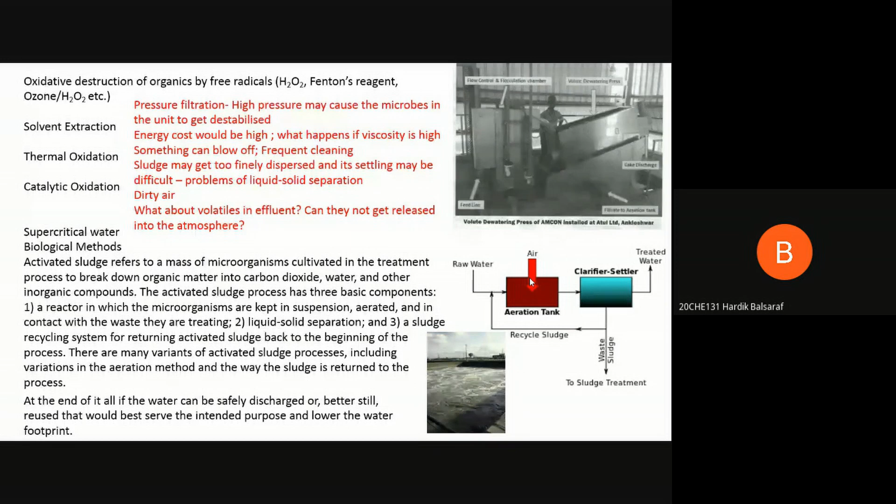Now, there is another aspect that you need to look at. You see, it's an aeration process. So you're taking your water and you're sparging with air, and then you're doing aerobic processes of degradation. Now, do you see any problem with an aeration process of this kind? Other impurities may be added when it is exposed to air or air is added. I mean, you are saying things which might come from the air, right? Yes, sir. That's a good point, if it interferes with the biochemical degradation. So you're saying airborne impurities, okay? I think that's a good point. It could affect. Any other thing that comes to your mind?

So the air that is introduced, does it have to be introduced at a certain pressure? Yes, it has to be, because you have to sparge it. So there has to be a positive pressure which you are applying, but probably no more than half a kg or so. It won't be a very high pressure. Okay, sir. Any problem?

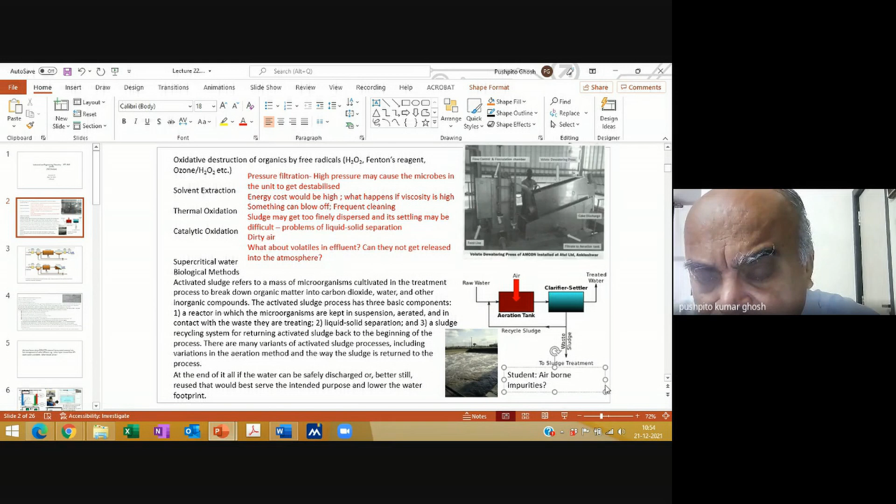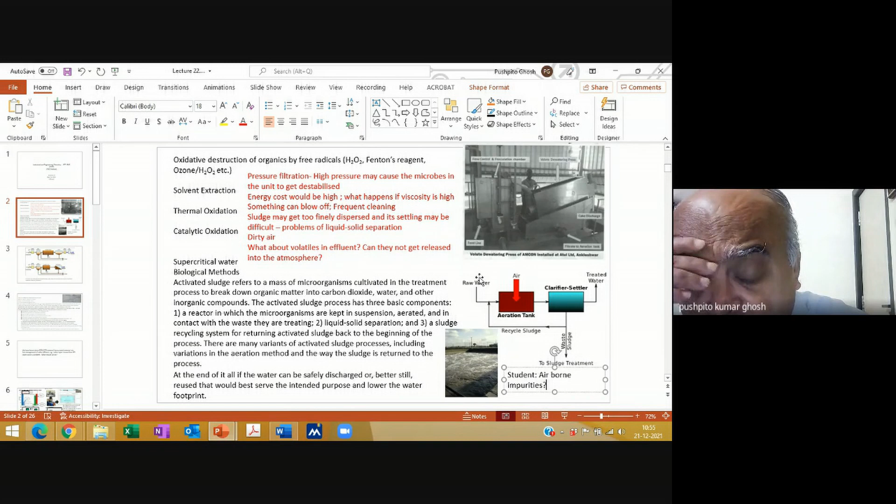You see, your raw water can not only have non-volatile organics, but there could also be volatiles, right? Volatile organics may be there, and when you are sparging like that, obviously the low boiling things can end up in the atmosphere, right? In fact, I remember I had taken the batch, maybe about 3 years back, to a company in Bangalore to their plant, and we spent the larger amount of time on the effluent treatment plant.

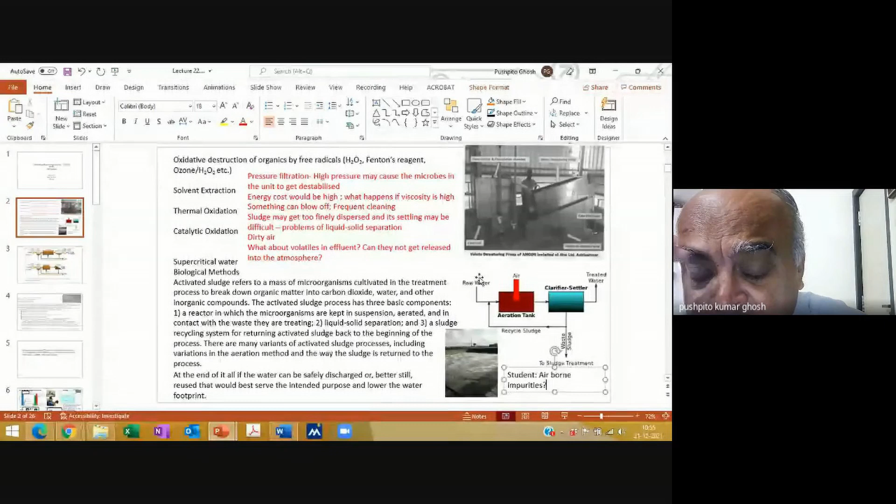And I was feeling a lot of smell over there, and I asked those people why I'm smelling things, which means that something must be going into the atmosphere. In fact, one of them was very honest, and he said, "Yeah, yeah, most of it goes into the air." Sometimes these people insist that you let us sparge with a higher pressure. I think what they're trying to do is let it all escape into the atmosphere, and nobody is monitoring that.

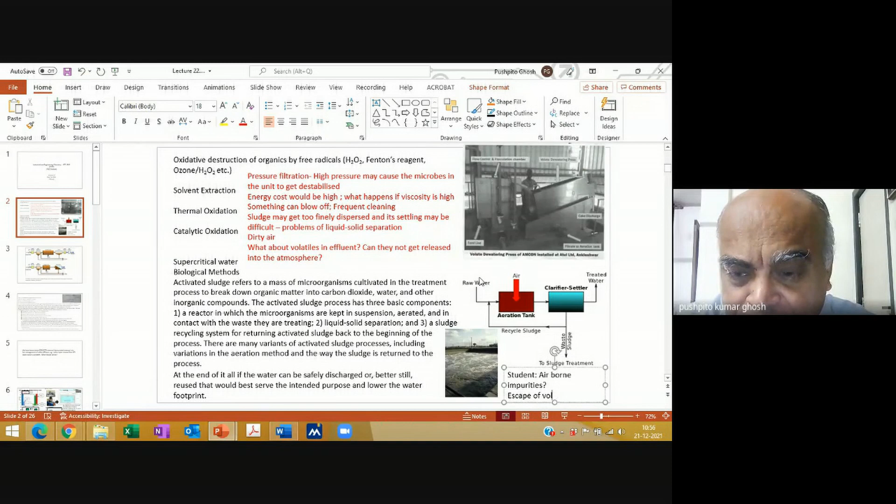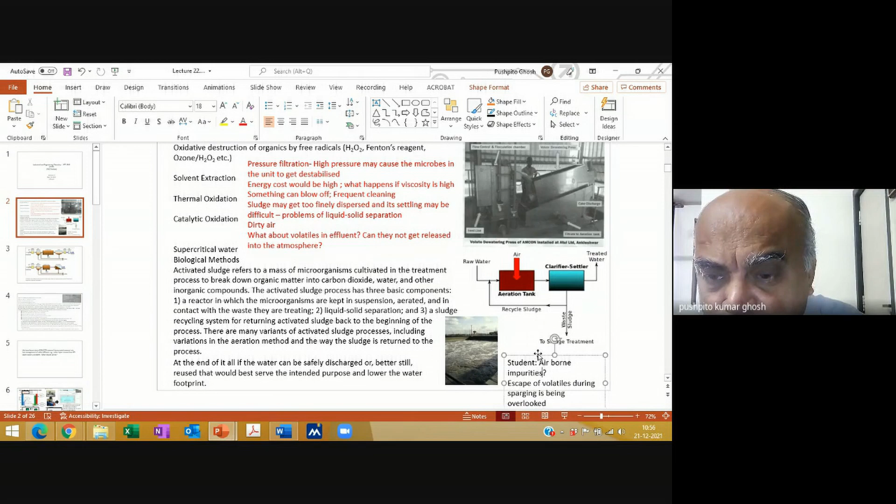So I think as engineers, you should not only look at the positive aspects of what people say. For example, I'm always skeptical about some of these things. That's what made me ask this question. I think that this has been grossly overlooked. Escape of volatiles during sparging is being overlooked. This is actually important, and just make a note of it. So you should be critical about whatever you learn.

Everybody sweeps these uncomfortable questions under the rug. I'm surprised sometimes. Why is it that nobody is asking the question at least? And that's why I put over here, what about volatiles in effluent? Can they not get released into the atmosphere? So remember that there are certain pitfalls in this process, but by and large, this is a very standard method of treatment, and especially if there are non-volatile constituents, then of course there should be no problem.

But in an open system, if there are volatiles, then I would be a bit wary of those, and I would first strip off those volatiles before putting it for treatment. Maybe do a solvent extraction, get rid of those kinds of organics, and then do the rest of it. Now, another thing is I see this as a wasted opportunity. Can you tell me why? Why do I see it as a wasted opportunity? This process. Not in all cases, but in some cases, it could be a wasted opportunity.

So please could you explain the question a bit? No, I'm just saying that you are putting raw water, which has got some organics, and then you are degrading it by this aeration tank. Then, of course, you are getting treated water, and all that is fine. But I'm saying that this kind of method of treatment, you could also view it as a wasted opportunity. What is that opportunity I'm talking about?

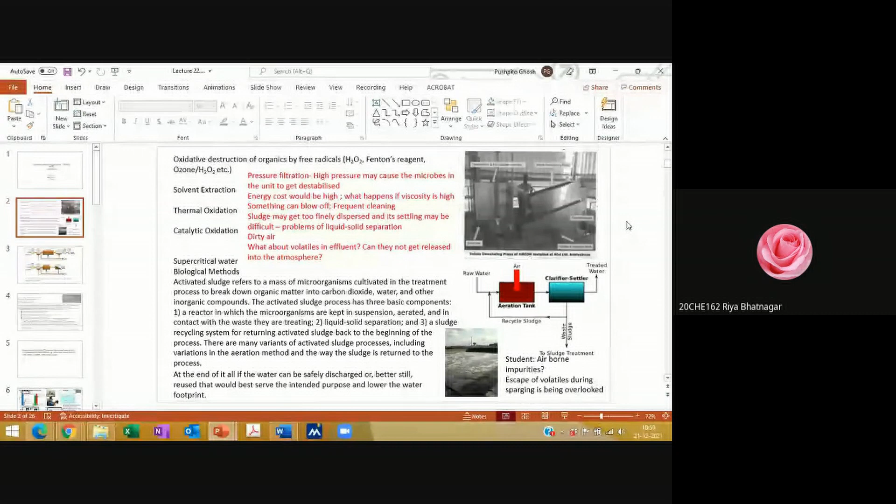So we could reuse these organics for some other process. You're talking about recycling some of these organics in your process and things like that, right? Yeah, that you should try and do upstream itself before allowing it to come to the effluent treatment plant. But that's a good point. In fact, whatever I am thinking of is not very different from what you're saying, but maybe a slightly different context.

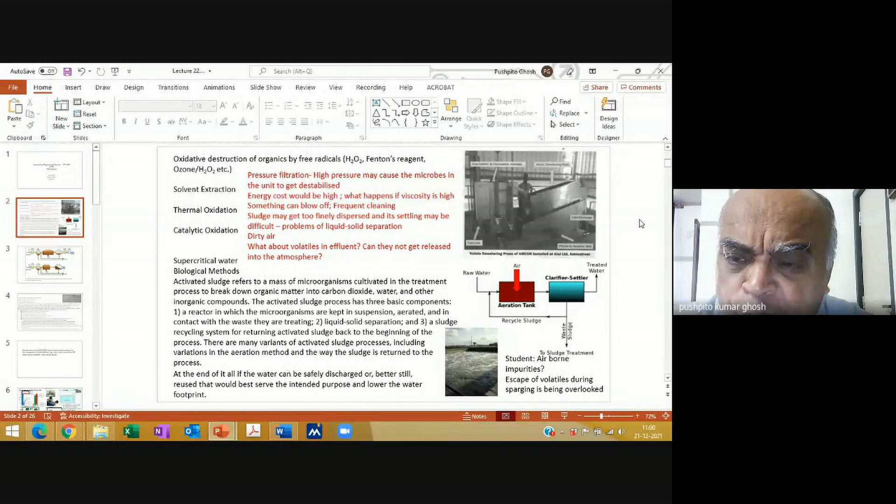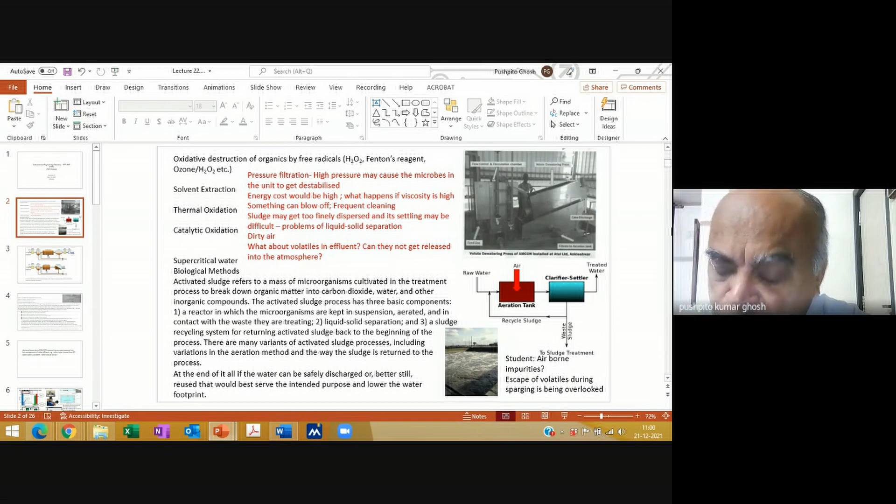So use this water as a cooling agent or something. No, that you will do after you treat the water. This treated water you can use for some of those applications. Yeah, so there will be applications of the treated water. So that would be good. Good thinking. The question I'm asking is, and I think one of you has said so nicely, that you can think of recycling some of the organics.

In fact, what people are also looking at is that if I've got a fair amount of organics, why do you want to convert it into carbon dioxide? If you, for example, do an anaerobic process, then you might be able to convert those into methane, biogas. Like, for example, distilleries do. All the distilleries, after they recover ethanol, get something called spent wash, which is quite high in organics. What they do is an anaerobic digestion and recover as much biogas as possible.

And then, of course, the rest of it is further treated. But they recover energy. So whenever you've got something with a calorific value, just think of recovering some energy from it. I'm not saying that it will be successful everywhere. If the amount of organics is too low, then it may not be practical to do it. But if your organic load is fairly high, then instead of doing this sparging and aerobic decomposition, you may want to do an anaerobic process.

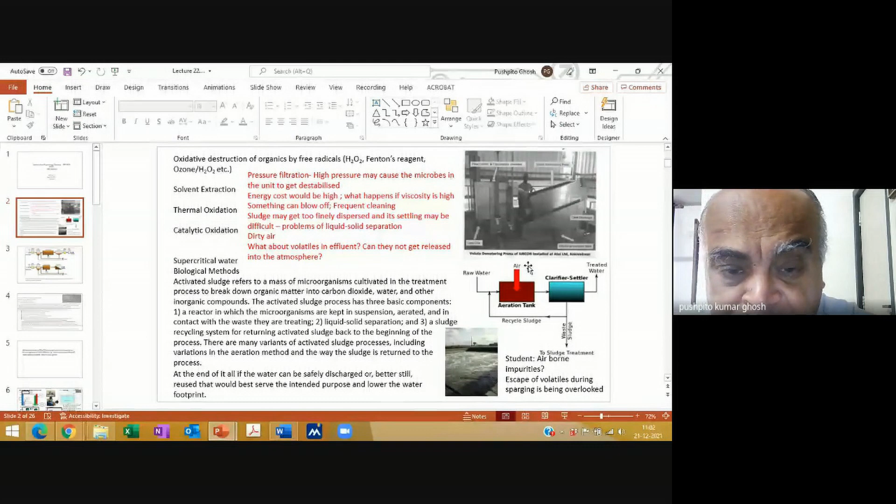But can't we utilize the CO2 in a process such as the Solvay process? Oh, yeah, you can use it. One is, of course, there has to be a proximity. Whatever you want to use it for, it has to be in the vicinity. Secondly, I think that, yes, CO2 definitely commands value, but not as much as, let's say, biogas.

Because this CO2 is coming out along with air and things. So you'll have to compress it; it's coming out with a low concentration. So you cannot just use the CO2 like that. You'll probably have to do some kind of a purification. And in fact, if the CO2 comes out along with some of these organics I was telling you about, then again, it may require a costly process of purification. Have I answered your question? Yes, sir. Okay.

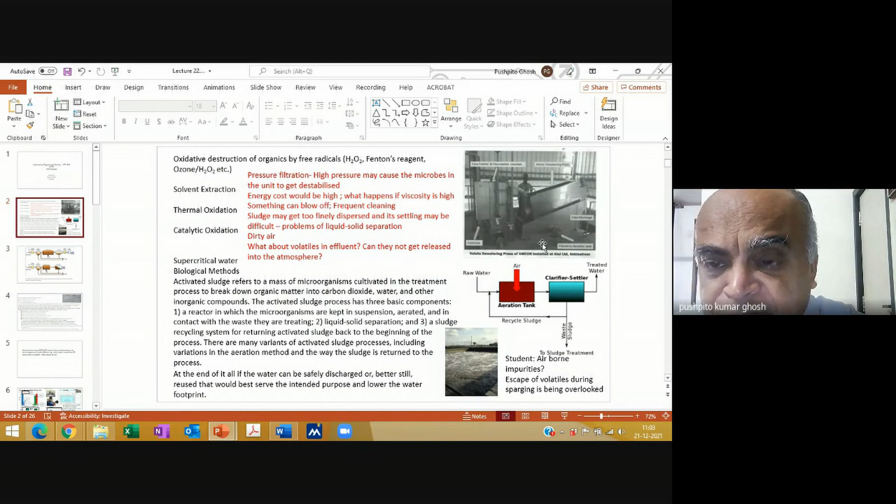Another thing which has become quite popular is what is known as the membrane bioreactor. You have a membrane module where this biochemical degradation is taking place. Maybe the bacteria, etc., are attached to the membrane. After it has done the job, you let it pass through, and these would typically be microfiltration, ultrafiltration type of membranes, and then you can do a much more rapid separation of your sludge.

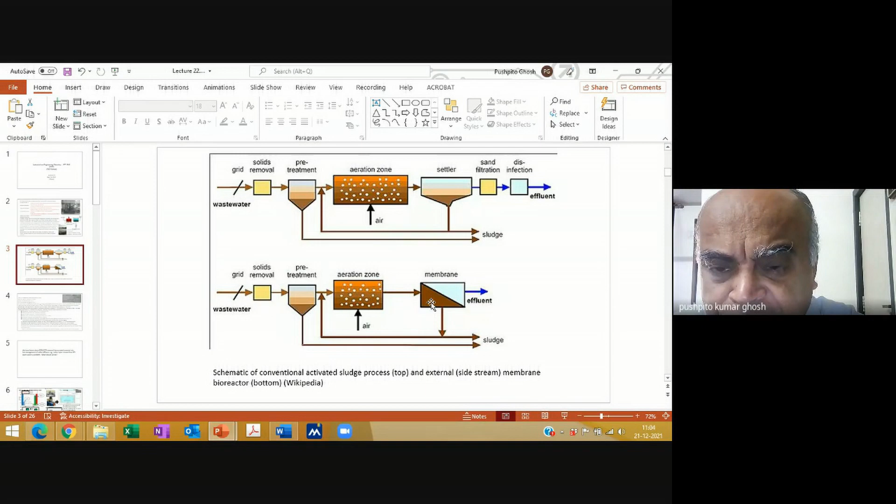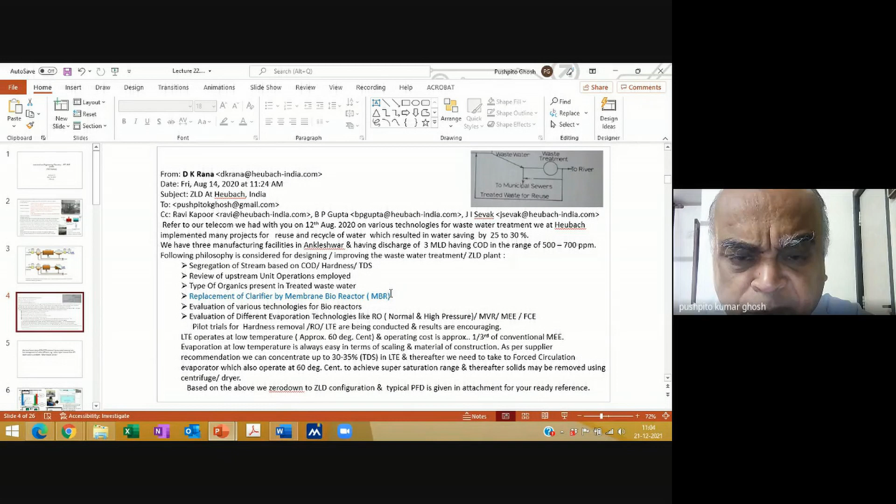This is becoming quite popular, and in fact, I showed you this letter from Heubach yesterday, and you can see that one of the things they have also proposed is replacement of the clarifier by a membrane bioreactor. Obviously, they must also have this problem of the rate limiting step of their clarification.

What we have done up till now is remove the organics. So let's assume that processes exist to take out the organics. But there are many effluents where the problem is not necessarily organics. There could be inorganics, heavy metals, etc. We saw how you might precipitate them or treat with an ion exchange resin. But when you've got loads of salts, like a saline effluent, let's say you do an RO of very saline water, your reject stream will have a very salty solution. Where will I discharge this? Those things are not going to come out with the kind of effluent treatment processes we have discussed.

One could be to use some method of precipitating those out. I remember a company that had, I think, sodium sulfate, and they were wondering what to do. I looked at the phase diagram. It was very clear that if you lower the temperature, you can get the sodium sulfate to come out. So I asked them, instead of trying to strip off water, why don't you just chill it and take it out? And they could take out about 70-80% of the sodium sulfate. Obviously, the inorganic load came down. Of course, it may not be successful everywhere.

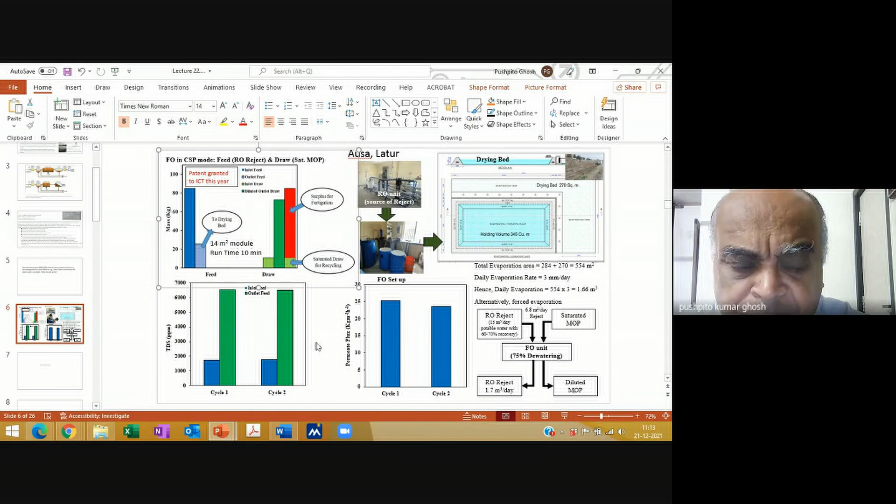No satisfactory solution has been found to the problem of RO reject water disposal management, especially in inland areas. What will you do? Either you discharge it irresponsibly, which is what the majority of the people do, or if you are conscientious about it, then of course you need to find a cost-effective solution. And this is basically going towards that cost-effective solution. Any questions?

Okay. Now, with that, we come to the end of water, and now I will start with fertilizers, and we will cover nitrogen, phosphorus, and potassium. So now we will come to the fertilizer which gave way to the greatest chemical process ever created, which is the fixation of atmospheric nitrogen. So how is atmospheric nitrogen fixed? What do you do?

What's the process? Haber's process. Yeah. Why are you so hesitant to say it? Is there any other way that ammonia has been made, or you can make ammonia? Or is it only the Haber process? And believe me, there were other processes. In fact, there was a time when nobody gave a damn about the Haber process.

That's the truth. We have, of course, learned that the first ammonia was obtained during the coking process of coal. It was found that there's a lot of ammonia in the volatiles. And that is what was used by Liebig to react with sulfuric acid and converted it into ammonium sulfate. And so ammonia really came as a byproduct of processing of coal. Things like liquefaction of coal, etc., was again very much talked about at one point, and it will be talked about again in the future.

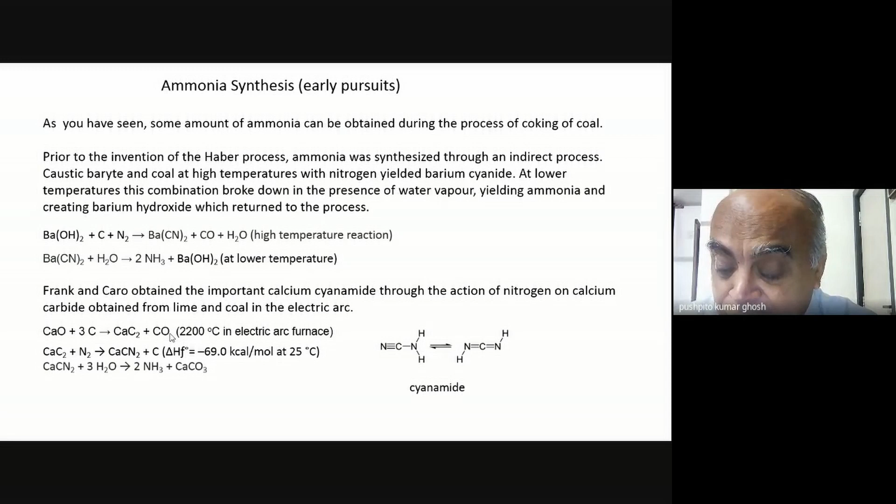But this calcium cyanamide did not die. And I'll show you, for example, a very important application. You can check with people who have diabetes. The biggest selling drug for diabetes is known as metformin, and that's got this structure. Okay, and guess what? Metformin is actually made from calcium cyanamide.

So you convert it into calcium cyanamide first, and under somewhat different conditions, when you pass carbon dioxide and water and raise the temperature, it then dimerizes into this compound, which is cyanoguanidine. This cyanoguanidine is then reacted with dimethylamine. You can work out the mode of attack; I'm not going to go through it. The mechanism is quite simple.

And it ends up forming this particular thing, and there is a positive charge, and that's why usually you'll get metformin hydrochloride. It is a cationic drug, and this is the biggest drug in the area of diabetes. And when I asked a friend of mine in the US where all this calcium cyanamide comes from, I realized that we don't manufacture it in India. Only now there's one or two small manufacturers, but all of it came from China and Mongolia. And look, this has been done since around 1890.

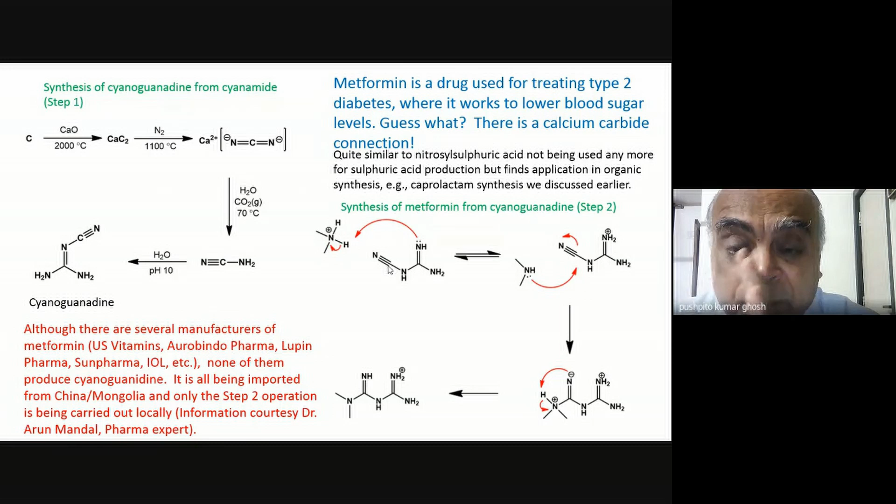Okay, now let me tell you what became famous, and it owes it initially to Cavendish and Priestley, who had observed lightning. What they found is that lightning actually leads to the combination of nitrogen and oxygen, and it forms N oxides. And once I've formed N oxide, converting it into nitric acid is simple. So they were not interested in making ammonia, and frankly, there's no need. I can even use nitrate as a fertilizer. So this was quite well known. But Cavendish and Priestley could never make anything practical out of it.

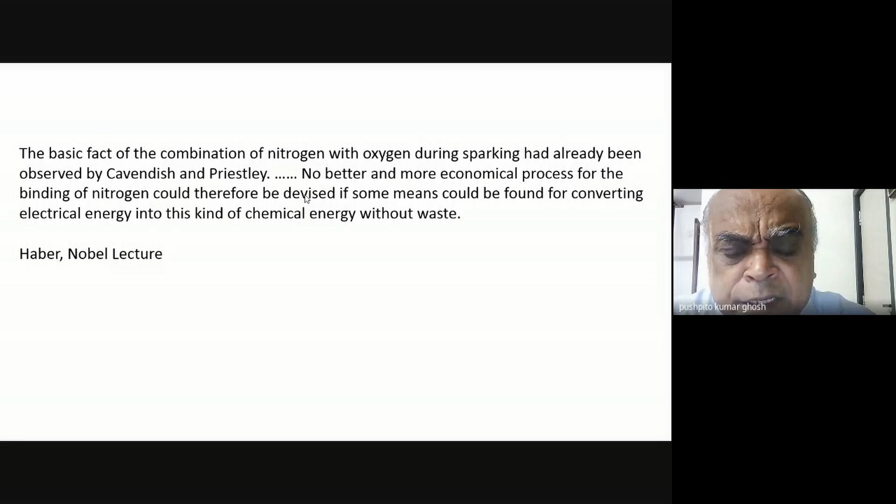Then came first the pair of Bradley and Lovejoy, and subsequently these two gentlemen, Birkeland and Eyde. What they did was simulate what Cavendish and Priestley had shown. They made an electric arc from these wires, and they passed a very high voltage so that it generated a spark, just like lightning. And then, when they passed the air through it, it formed nitric acid. But it was a highly inefficient process.

And what these two people used is that a physicist, Julius Plücker, had shown in 1861 that if you apply a magnetic field across this electric arc, amazingly, it spreads into a circular disk. You can imagine, if I've spread it out into a disk, obviously I've created a huge surface area for the reaction. So with that, they were able to make a practical process out of this. And I think Birkeland was a physicist and Eyde a civil engineer.

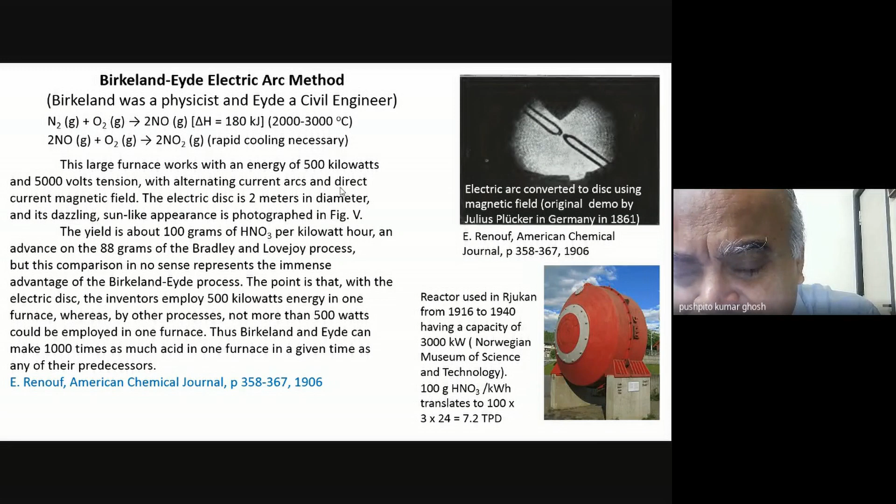All the ammonia hasn't decomposed. Right, and therefore, if you express it with your knowledge of physical chemistry or chemical engineering, what will you say? There may be an equilibrium. Brilliant. That's all I wanted to know from you. I'm so happy. So the concept of an equilibrium in this reaction was born. And this is what Haber began to study.

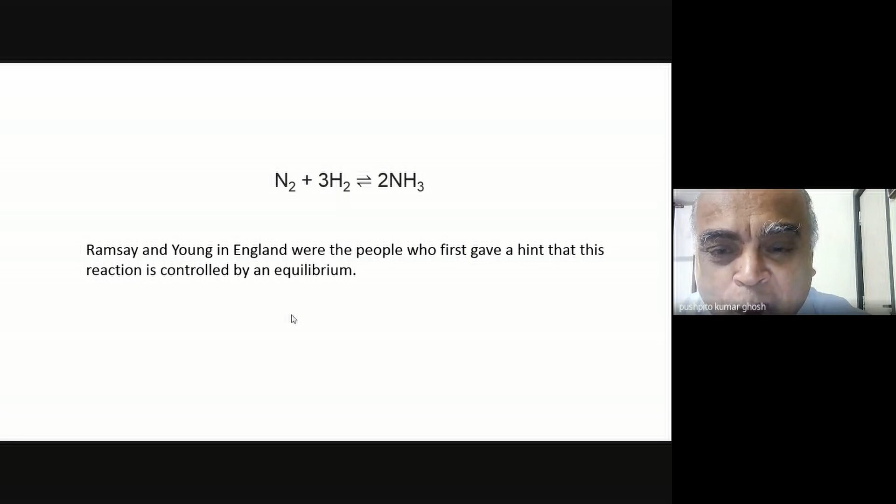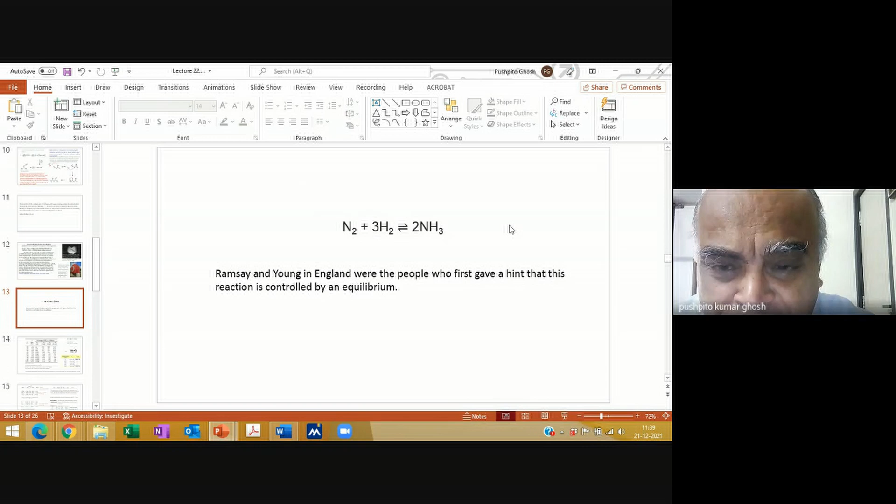So on Friday, we will continue, and I will introduce you to the Haber process. The foundation is the work of Ramsay and Young. We will continue again on Friday, 1:30.